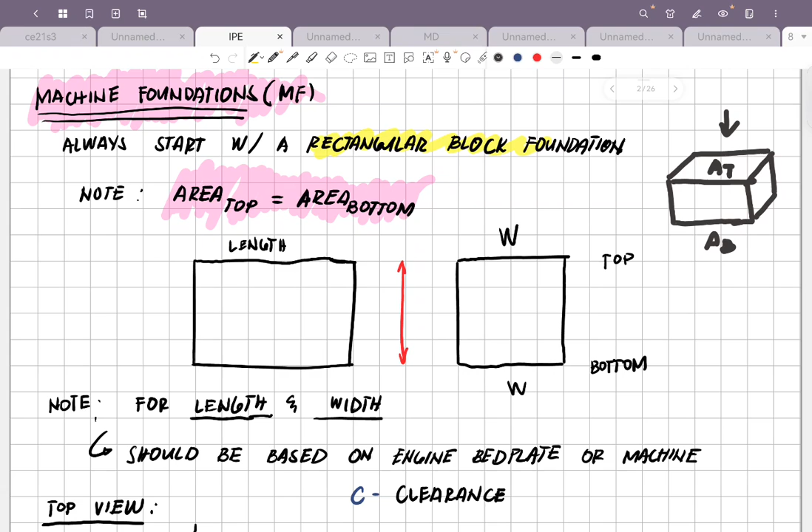So the area at the top equals the area at the bottom. This is where you place the machine, on this part. This is the area of the top, and this is the area of the bottom. Let us consider its face - the top view. This is the top view, and then the side view.

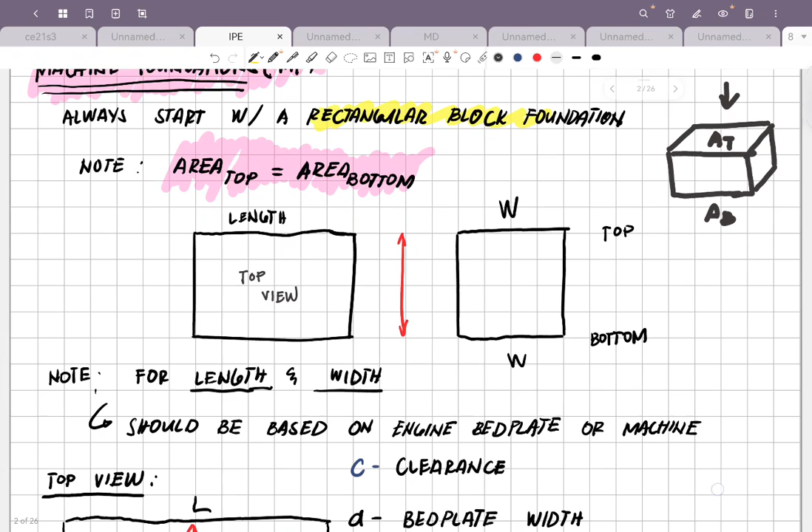Now, if you consider it as a solid block, you'll notice you have a rectangular block with a volume, and that volume is calculable using solid mensuration. So the total volume of that foundation - the volume of your prism or rectangular block - is equal to length times width times height. Simply, your length and width are the area of the bottom and top, which are the same. Then you also consider the height.

But there are several considerations regarding the height, depending on, number one, the weight of the machine. How many cylinders does the machine have? What power does the machine produce? And then there is an empirical coefficient depending on the specifications of the machine that you will put up on your foundation. We note the length and width of the foundation - there should be a consideration based on the engine.

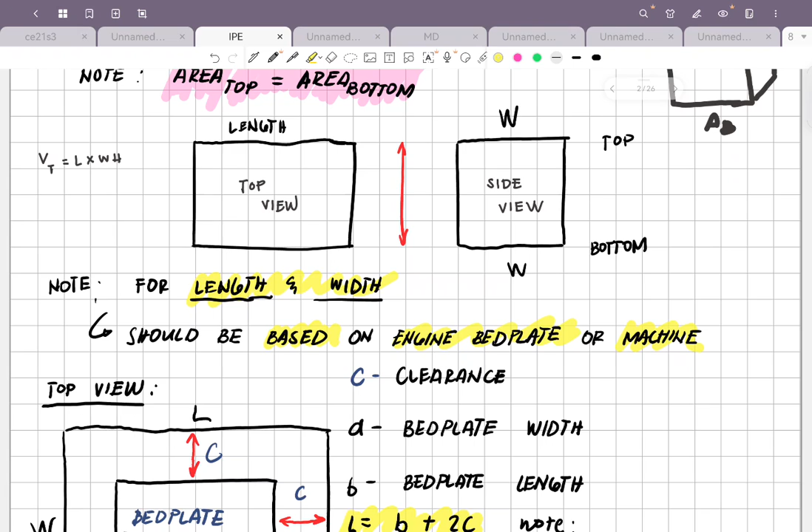Based on the engine bed plate or machine, depending on what the specified bed plate is. What is a bed plate? That's the steel plate on which your machine sits, which has slots at the ends. Those slots are for the adjustment of the bolts, whether laterally or longitudinally. You should also consider the clearance.

So if this is your large rectangle, look at this, here it is. This large rectangle is the foundation footing or the foundation area - that's what it covers. Your bed plate, that's the steel plate, is here in the middle - that's what the machine will sit on.

You should consider the clearance - your bed plate shouldn't reach the boundaries of your area. So you see, the clearance is equal throughout, like making an annular section. If you consider this part, that's the difference between your bed plate and your rectangular foundation - that's their difference. So, the equal difference between the length and the width is called the clearance.

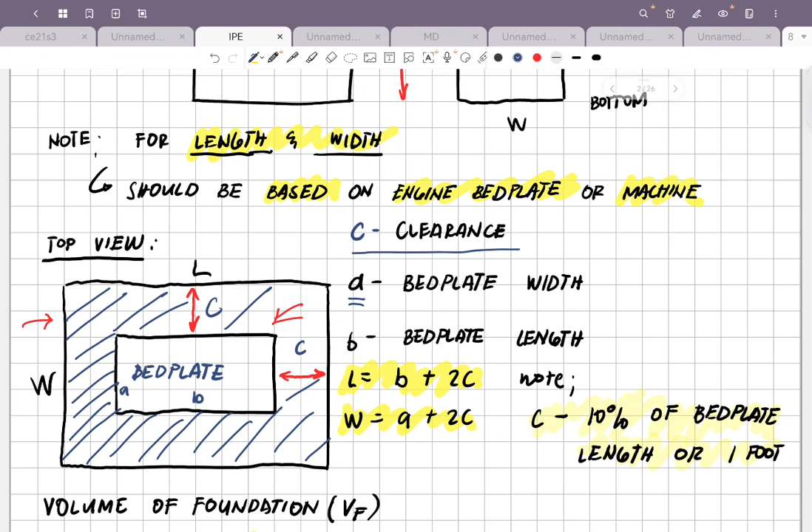And then, we say A is the bed plate width, the lapad ng bed plate mo. And then B is the bed plate length. So, in order for you to get the length of your foundation, L is equal to B plus 2C.

And then, the width of the foundation, simply, how much is that? You can also see it in your drawing. The width of the foundation, W, is right here. Mula rito hanggang dito, let's color it. Bigyan natin ng pula. From here to this part is W.

Tapos, dalawang C. So, ibig sabihin, W is equal to A plus 2C. Ganun din yung L. L is equal to B plus 2C.

We note that there is a consideration when it comes to clearance. It is 10% of the bed plate length or 1 foot. Yung ilalagay mo, 1 foot siya. Ang layo niya doon sa length. That is 1 foot. Or, it could be 12 inches.

Sometimes, kapag metric, the consideration is 10mm, 6mm. Pero, dinidesign natin yan in English. On the Book of Faires, Virgil Moring Faires, tsaka kay J. Potter, nakalagay doon na the consideration for your clearances should be 10% of the length or the width, and it could also be 1 foot. So, your clearance from your length to the base of the bed plate is 1 foot, 6 inches to 12 inches. Safe yon.

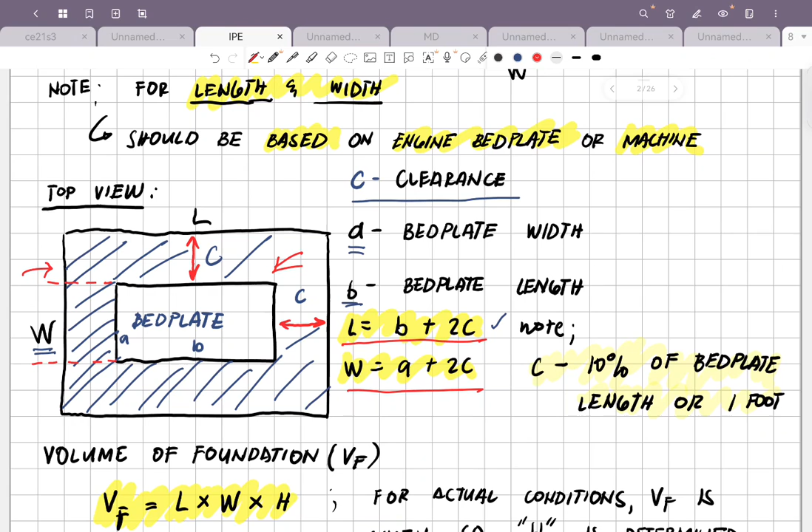So, for the volume of the foundation, again sir, ang foundation saan ba gawa yan? Sa concrete, diba? Concrete and reinforcing bar. Okay, so concrete, reinforcing bars, kabilya. Yung kabilya, steel. Steel bars.

So your concrete, may certain mix yan. Pag naghahalo ka, yung flooring ng bahay mo, iba ang mix nun. Yung iyong biga or the beams should have different mixes, depende sa ilalagay mong bigat. Mas mabigat, dapat mas denser and mas makapal yung gagamitin mong bakal. The purpose of your concrete, yung semento, is for compressive forces, counteracting compressive forces. Now, your reinforcing bar naman is tensile, for bending. Kaya pinaghahalo sila sa foundation.

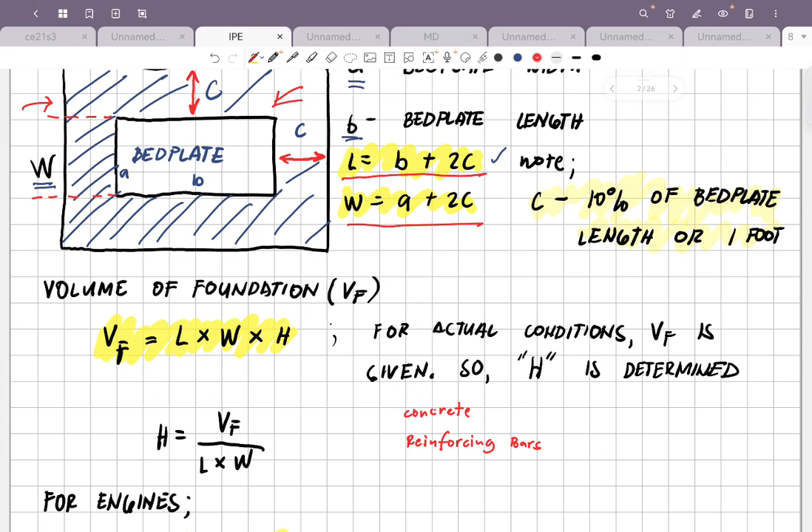Because your foundation, when your machine is put upon a foundation and then it moves, in order to produce power, what will happen? There are vibrations. And those vibrations will be the one to have the tensile effect and then the compressive effect on the machine foundation.

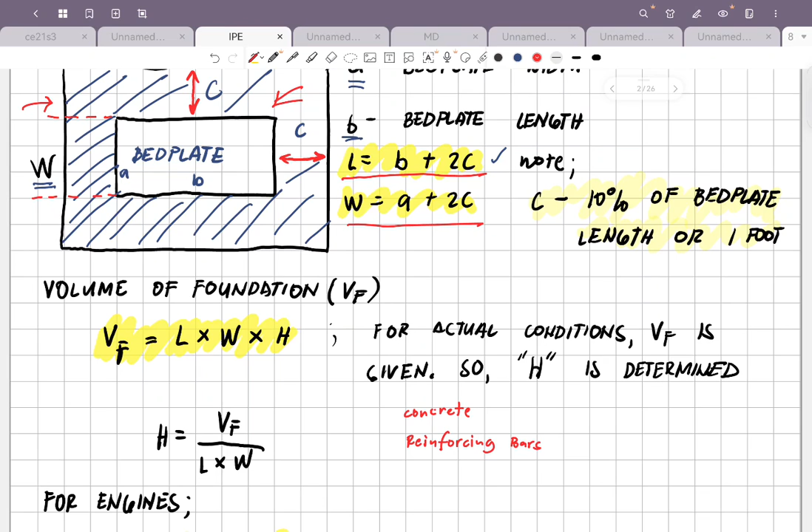So paano ba yung machine foundation natin? Again, that is length times width times height. Length of the foundation, width of the foundation, and then the height of the foundation. Now, sometimes, hindi natin ma-determine yung height ng foundation, so gagamitin natin yung volume of the foundation.

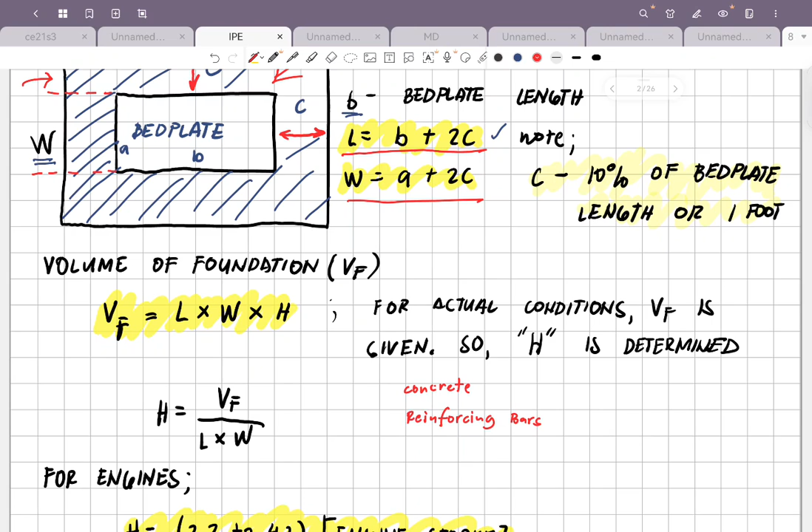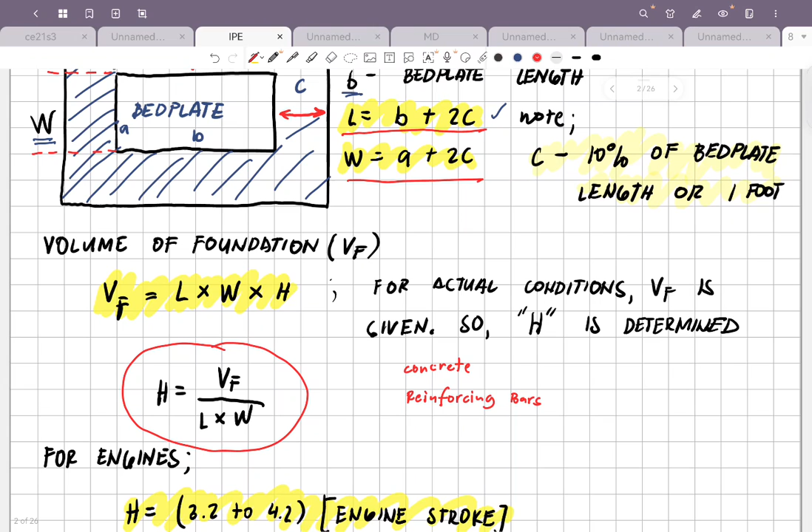So, for actual conditions, VF is given. Determinable yung VF. Later on, makikita natin kung paano determine yung VF. That is depending on tables, empirical values, and determination of the machine weight or power. So, yung height ng foundation natin can be derived from this formula: H is equal to VF divided by length times width.

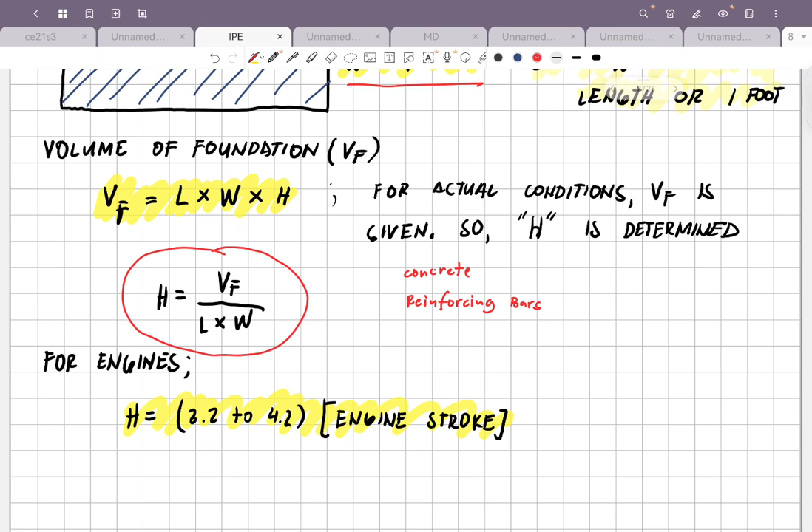Now, for engines, kung meron ka dyang engine stroke, ilang strokes ba ang engine? It could be 4-stroke or 2-stroke, but mostly, this is 4-stroke. So, 4-stroke lang yung engine. This is from 3.2 to 4.2, depending on what you will select. Depende sa magiging calculation mo yan. But to be safe, you always design for the minimal value, 3.2, yung multiplier mo.

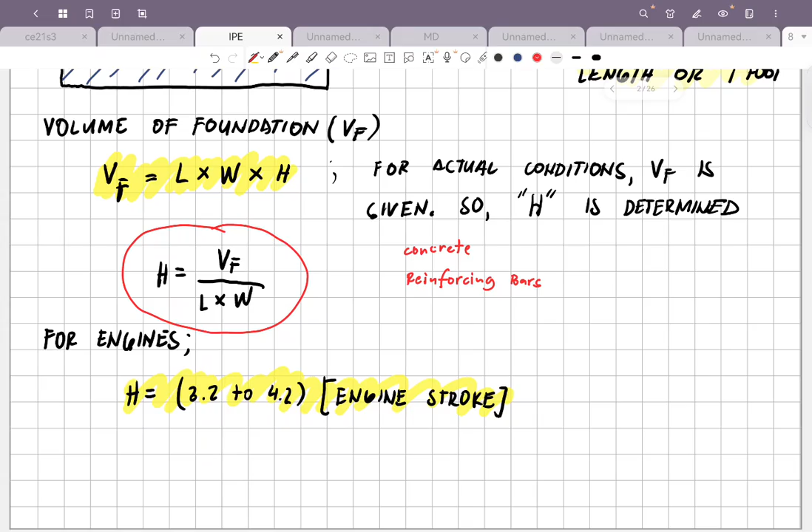So that is 3.2 to 4.2 of the engine stroke, yung height niya, i-multiply mo. So, we recall, sabi ko nga, that the volume of the foundation is length times width times height. But, syempre, that is a solid material. We can determine the density of your concrete. Concrete is a mix of aggregate, sand, cement, and then water. So we can determine its specific weight or just the weight.

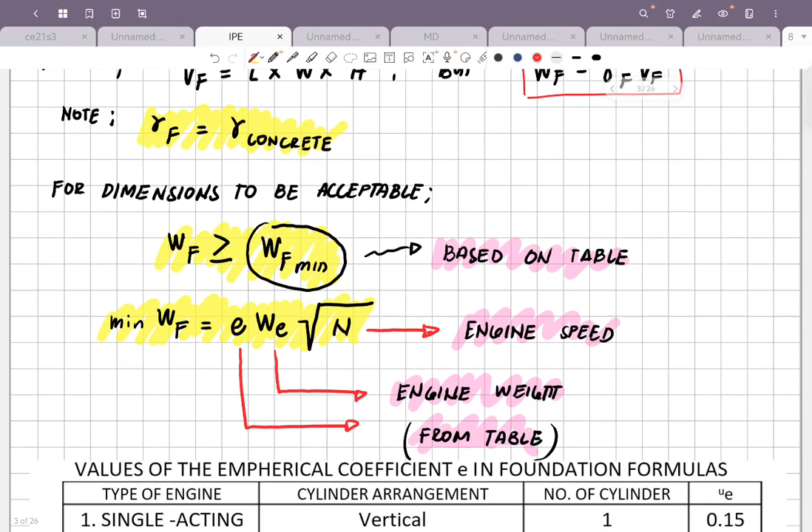So we could say that the weight of the foundation is equal to the specific weight of the foundation, depending on the material or class of the concrete that you use, multiplied to the volume of the foundation, which is determinable by the dimensions. So we note that the foundation, we assume is total concrete. So, for dimensions to be acceptable, ito yung gagamitin mong consideration. The first consideration is that the weight of the foundation should be greater or equal to the weight of the foundation minimum.

The minimum weight of the foundation is based on an empirical value from tables, or you can base it on your machine. The minimum weight of the foundation is equal to an empirical value E multiplied by the weight of the engine. The weight of the engine is the shipping weight, whether dry, tare, or wet - the total weight of the engine. Then multiply by the square root of the speed at which it is rotating at maximum.

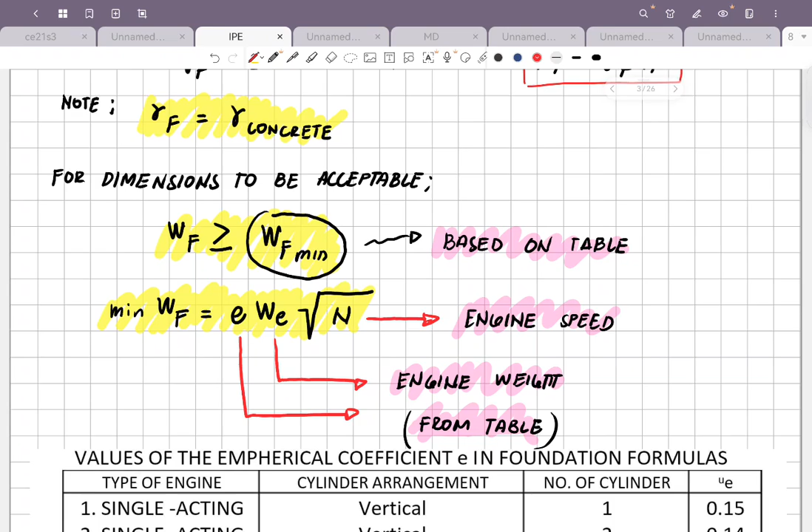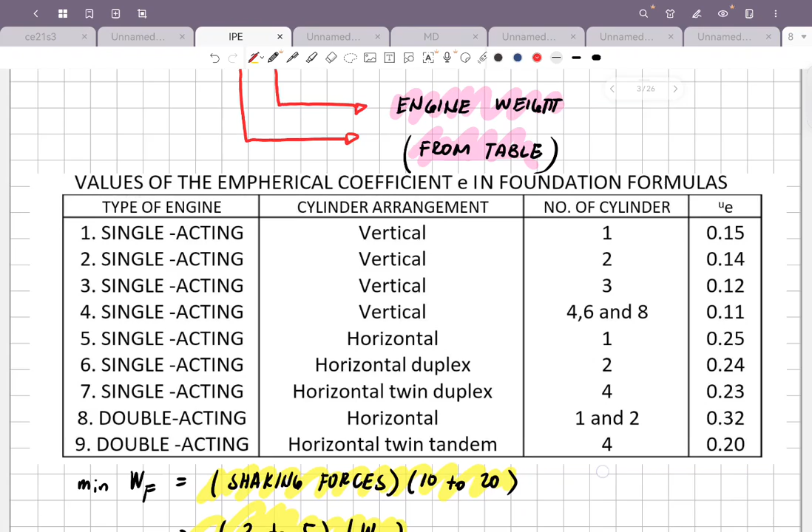Now, for the minimum weight of the foundation, you can also consider the shaking forces, but mostly the consideration is based on this. This is what you'll base it on. If it satisfies this condition, it means the foundation is good, and you can use a rectangular foundation when you meet this requirement.

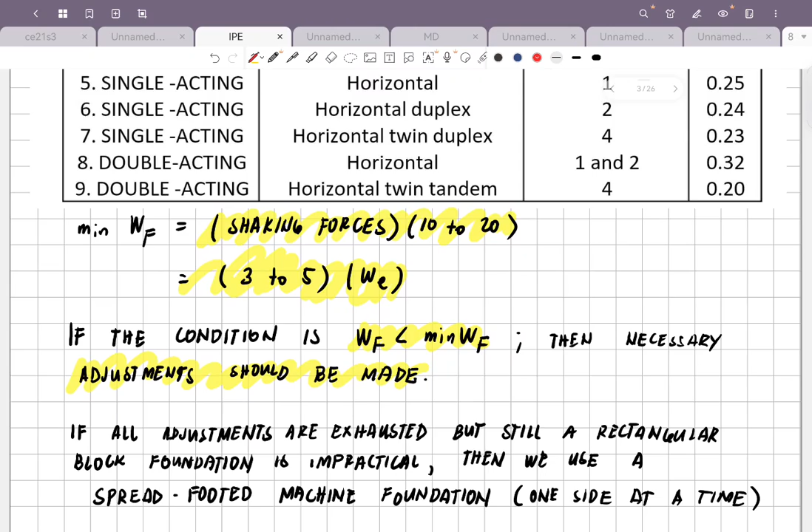Another consideration: if the weight of the foundation is less than the minimum weight required, then necessary adjustments should be made. You'll need to adjust something there. This will make more sense once we solve a problem. So, you adjust the length, adjust the height, adjust the width - but if the weight of the foundation still isn't greater than or equal to the weight of the engine, and all adjustments are exhausted, meaning you've done everything but it still doesn't work, then that's the time the foundation won't be rectangular anymore.

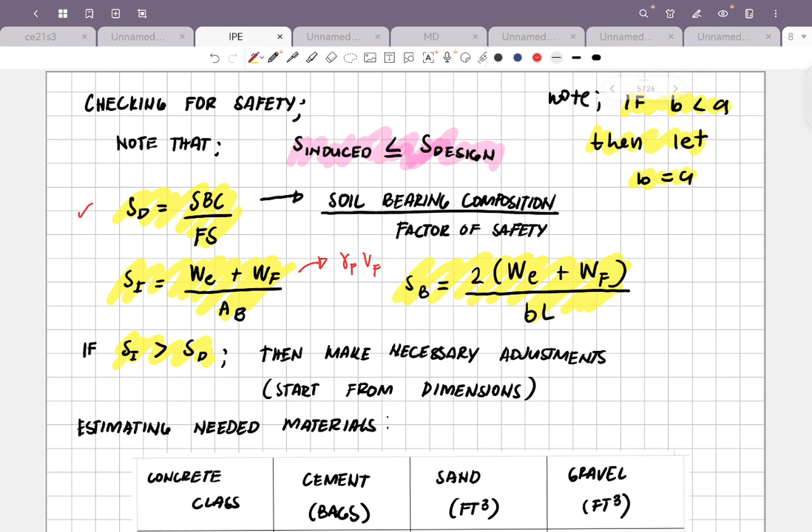Kunwari, ito yung number of cement sacks na mayroon ako. Magkano ang semento? 200 pesos. Gagastos ako ng 99 sacks of cement.

Isang kubikometro, or isang truckload, isang elf load, tinatawag nila sa construction. Isang elf load of sand is 3,000 pesos. Gravel is half of the sand. So magkano na? 4,500. Okay?

99 sacks times 200. Plus reinforcing bar. Ang reinforcing bar kasi is per 10 feet. Okay? Ilan ang magagamit mo? O kung yung 10 feet, meron kang size na 12, ano pwede mong ma-measure?

Yung weight. Diba? Makakuha ka ng volume eh. May length, meron kang size. Meron ka ring density ng steel. Ano bang density ng steel? Kung tandaan nyo pa, 7,850 kilogram per cubic meter or 0.285 pound per cubic foot.

Handa pa? Per cubic inch. That is the density of steel. Eh, hindi tinuturo yan. Eh, anong density ng water? Sige nga. 1,000 kg per cubic meter. Correct yun. Okay? So, ganun lang kadali ang foundation.

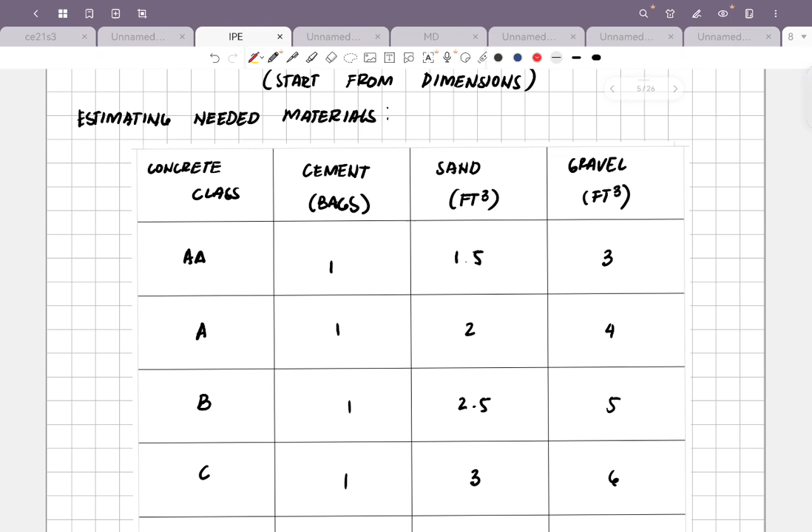But there are certain classes. Okay? If sinabing gagamitin mo si AA, first class yun, si AA. Matibay yan. So, 1 cement bag per 1.5 cubic foot. Ang gravel mo is 3 cubic foot. Kuwari, isang semento, ang halo mo, 1.5 kubiko talampakan ng sand.

Yung bato, ito. Tapos yung reinforcing steel bar, i-compute mo na lang yun after mo magawa yung weight ng foundation. Kasi empirical pa rin yun. Almost parang 1% to 2% ang reinforcing steel bar ng total ng foundation weight.

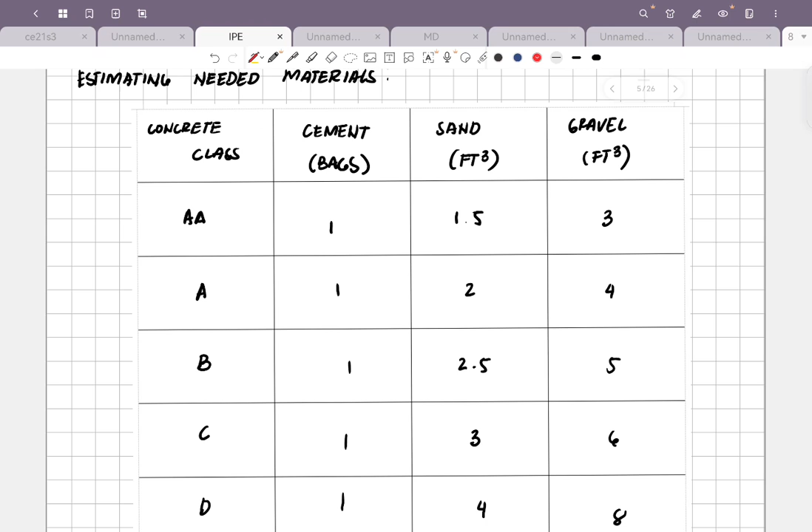Okay? So, ini-indicate to. Sir, kailangan bang kabisado ko to? Di ba sinabi ko sa inyo, pag naka-table, huwag nyo kabisaduhin. Binibigay yan. Pero commonly, pag sinabi dyan na ordinary or common, ito yung common. 1 to 4. 1 to 4 is common. Kahit saan yan. Flooring, footing, biga, 1 to 4 yan. Yan ang alam ng mga foreman natin.

Pag sinabing ganyan, o di isang semento, meron kang 2 kubiko feet ng sand. And then, 4 na parte ng gravel. Tapos, i-compute mo na yung water dyan. Later on, makikita nyo kung paano.

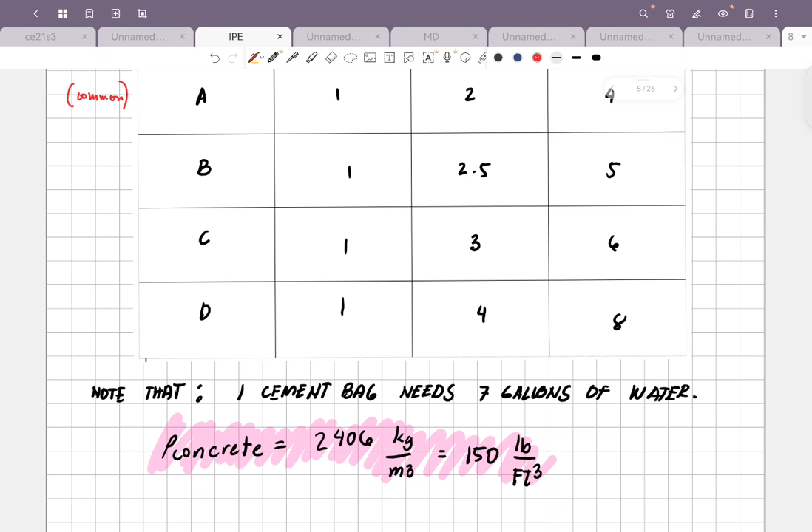We note that, ibig sabihin, 1 cement bag needs 7 gallons of water by standard. 7 galon ng tubig, isang semento. So, ibig sabihin, 1, 2, 4, 7. 7 gallons. I-convert mo na lang sa cubic feet. Diba? 7 gallons. So, 7.481 gallons, 1 cubic foot. Tama?

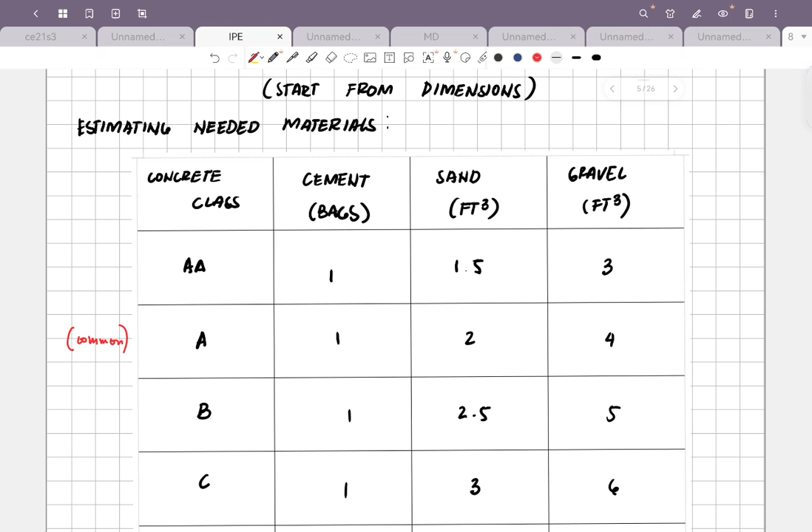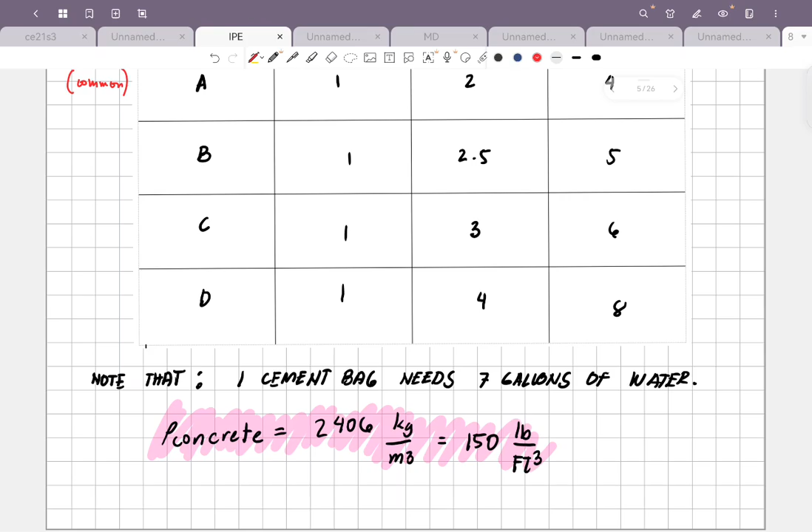Ganun yung pag-select dyan. And remember that the density of your concrete, yung buo na, halo-halo, semento, sand, gravel. Sir, bakal kasama. Hindi pa. Yung semento lang yan. So that is 2406 kg per cubic meter. Or that is equal to 150 pound per cubic foot.

Now, for the yield, ibig sabihin yung total volume ng inyong materials, okay? Absolute volume of the materials. Ano ba yung absolute volume? So, every cubic feet ng material, meron kang isang bag ng semento. Tama? So, that is the absolute volume of materials.

Wari, meron akong 3 semento, okay? Or dalawang bag ng semento. O, ilang gravel yun? Sa 1, 2, 4. O, 4 times 2, 8. Kung meron naman ako ng sand, so ibig sabihin, 2 bag ako ng semento, 4 na sand. O ilang galon ng tubig, 2 semento. 14, diba? Ganun lang kadali yun.

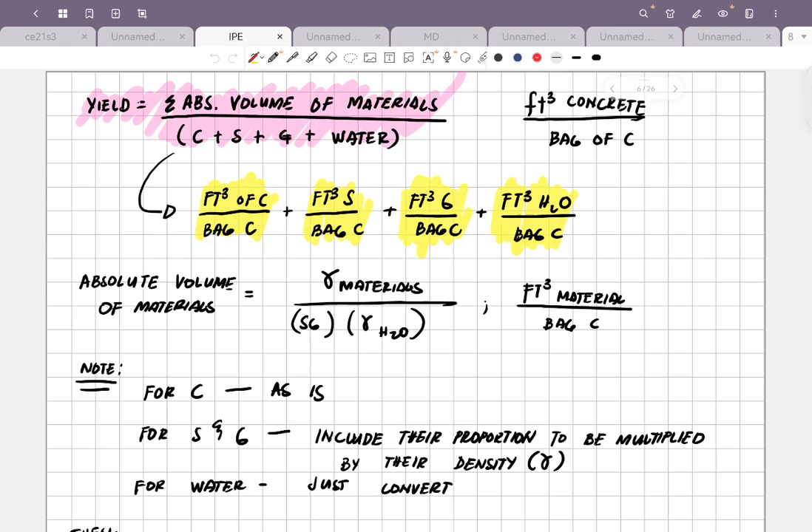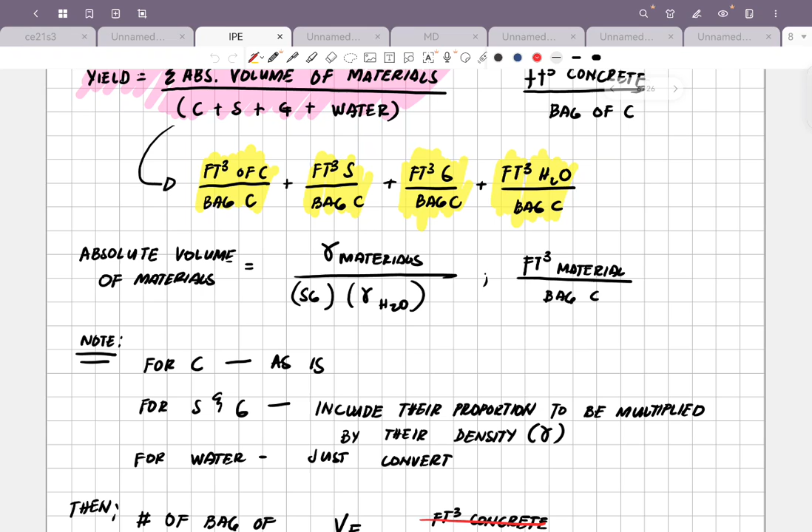Naging komplikado lang kapag di kayo marunong mag-simplify. Now for the absolute volume of the materials, yung specific weight of the materials, okay, ano ba specific weight of the materials? Yung concrete. That is specific weight niya. Divide by SG nung material times water na gagamitin mo. So, for C, as is yun, 1 bag of cement.

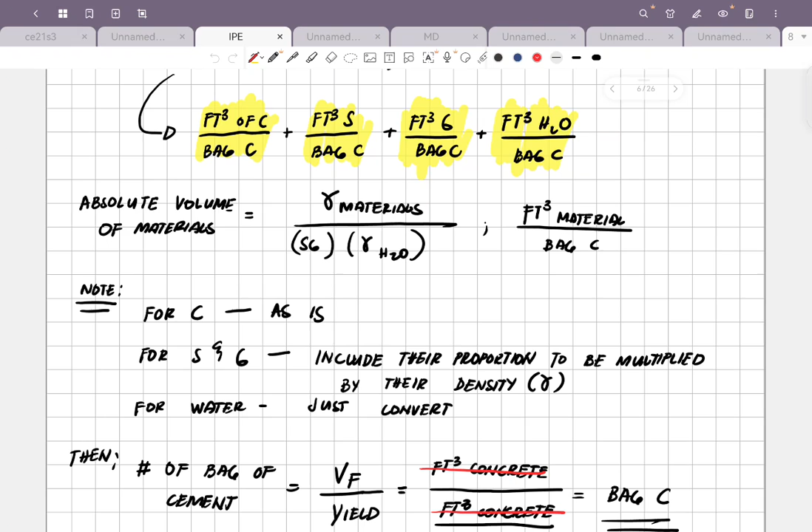For sand and gravel, include their proportion to be multiplied by their density. Pakita ko sa inyo on the solving part. Then, the number of bag of cement equal to volume of the foundation divided by yield para makompute mo yung bags of cement na kailangan.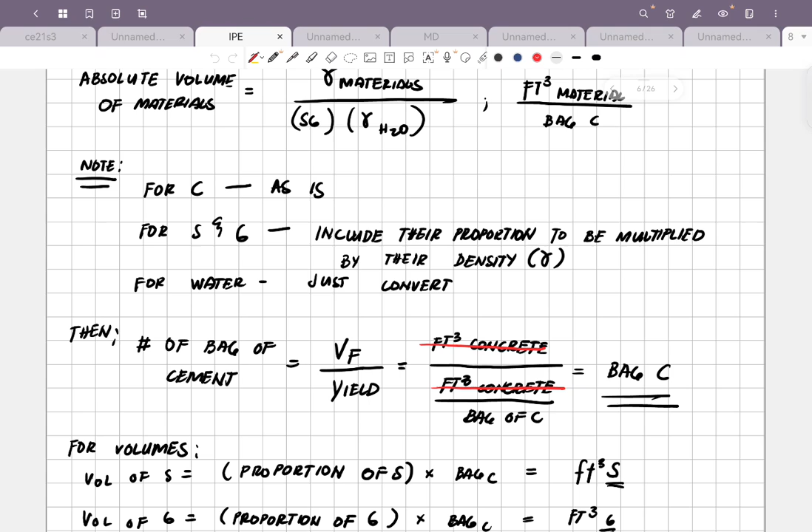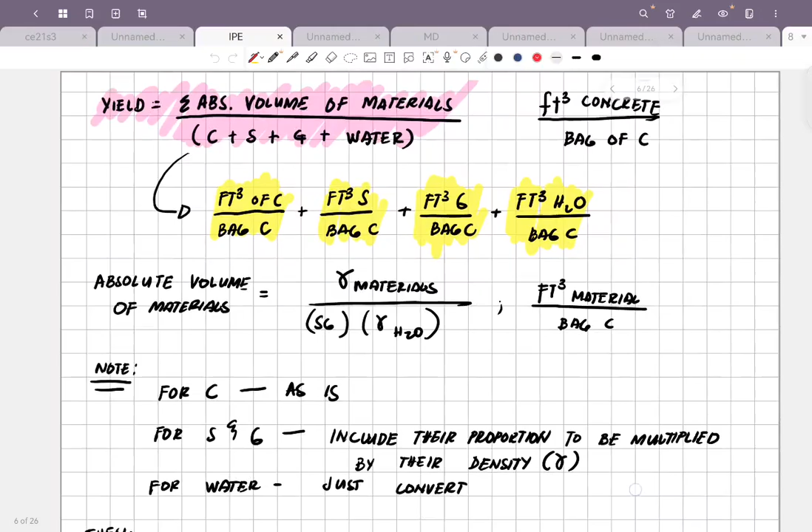Okay? Ang usapan natin dito is sa water na. Ang hinahanap is the bag of cement. So, for volume, ay volume of sand, proportion of sand times the bag of cement. Eh, para makancel mo kasi nandito yan. Oh, bag of cement. Multiply mo yun nandito. Dito. Ganun din yung sa G.

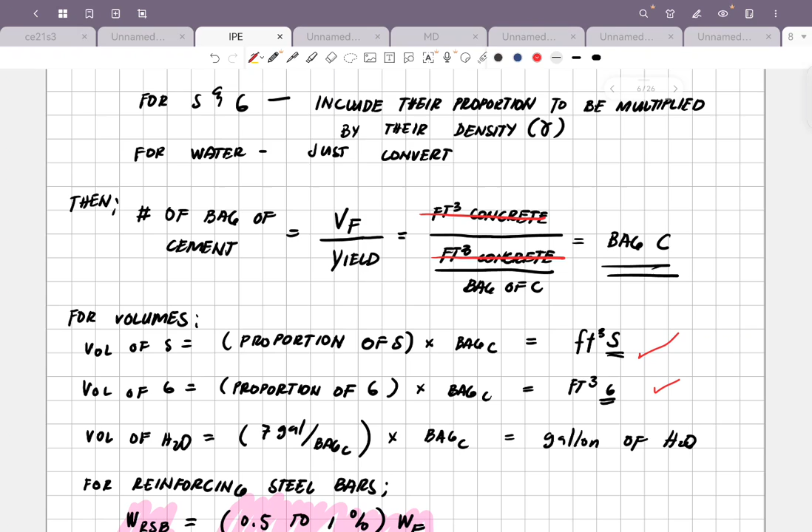Sa water, we know that 7 gallons of water per bag of cement times bag of cement. So, tubig, galon ng tubig ang makikita natin dyan. For reinforcing steel bars, weight of the reinforcing steel bar is equal to 0.5 to 1%, parang sinasabi ko kanina. Pero this time, parang ginagamit nila 1% to 2% of the weight of the foundation.

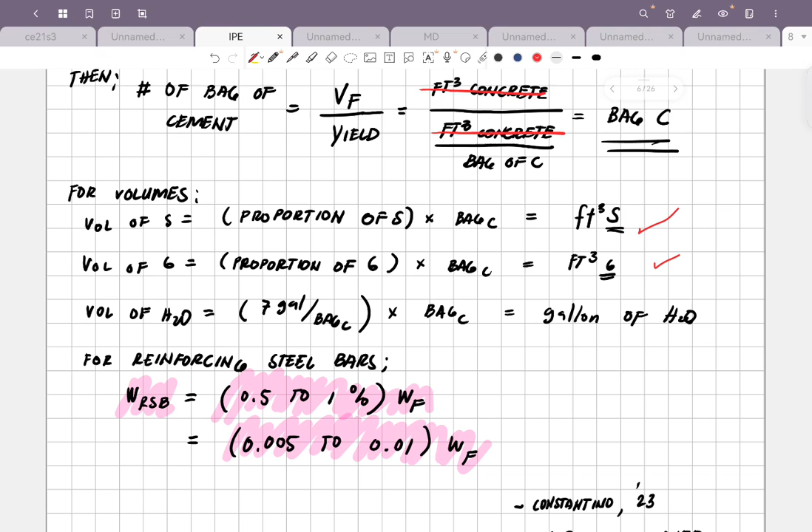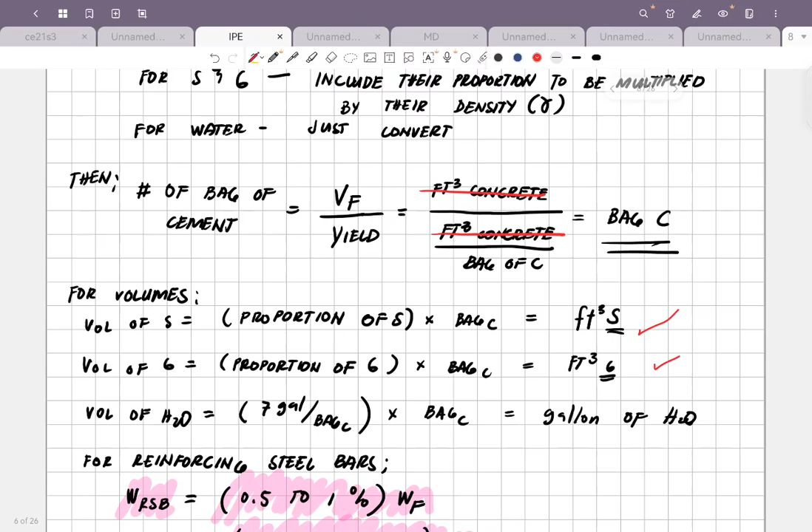Okay? So, much better if we will be given a problem set. So, that will be yung discussion ng machine foundation. Okay? So, let us take a break.